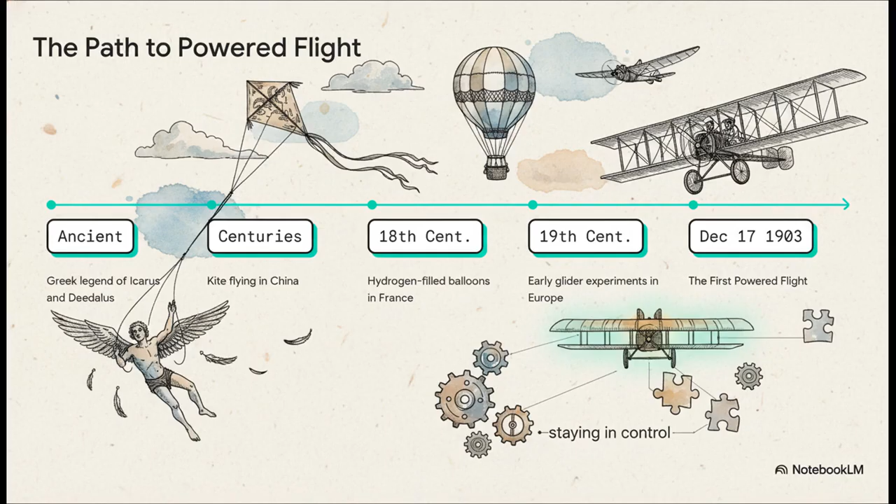See, it wasn't just about getting off the ground. The real challenge was staying in control once you were up there. And the final crucial piece of that puzzle didn't come from some famous university or a government lab. It came from two brothers who owned a bicycle shop in Ohio.

The true genius of the Wright brothers wasn't just slapping an engine on a glider. It was their invention of three-axis control. It was the first system that let a pilot actually steer the plane up and down, left and right, and keep it level. That solved the whole problem.

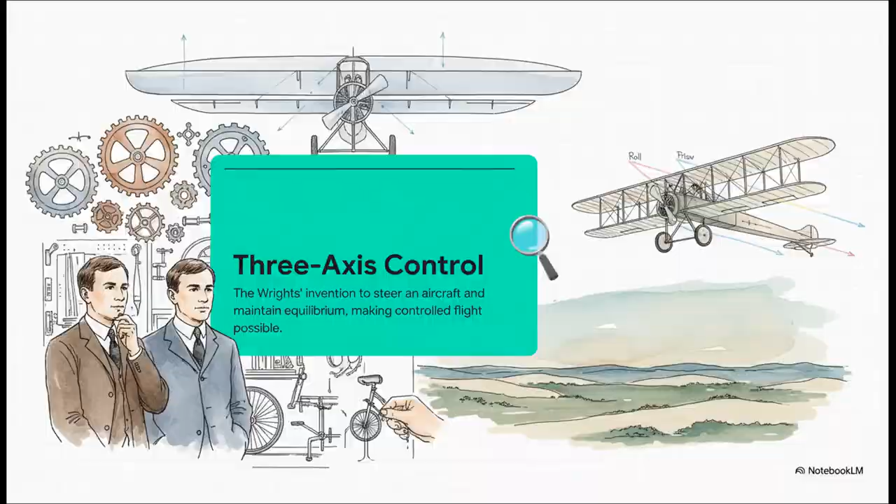And with that breakthrough, on a cold, windy morning in Kitty Hawk, North Carolina, Orville Wright did what no one had ever done before. The first successful, powered, controlled flight in history. And how long did it last? Just 12 seconds. In those 12 seconds, their little plane, the Wright Flyer, traveled just 120 feet. Now, to put that into perspective for you, that is shorter than the wingspan of a modern Boeing 747 jumbo jet. A tiny, tiny hop for a machine, but an absolutely giant leap for all of us.

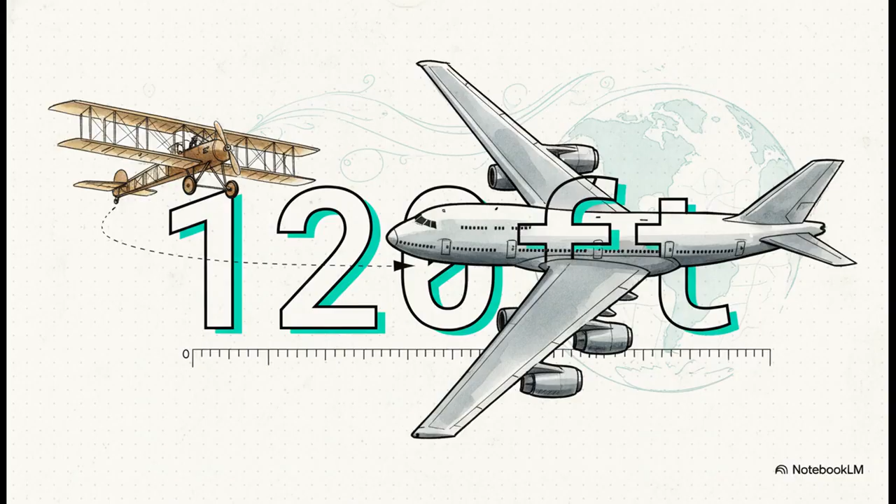But they weren't done. They actually made 4 flights that day, with the longest one lasting almost a full minute. And then, after all that success, a big gust of wind came along and just wrecked their little plane. It was so damaged it never flew again. But it didn't matter. The secret was out.

Humanity could fly. So how in the world did we get from that fragile little wood and fabric flyer to the massive, powerful jets we have today? Well, a huge part of the story is about the materials we build them with. And the evolution here is just staggering. The Wright Flyer was made of spruce wood and muslin fabric, basically sticks and cloth.

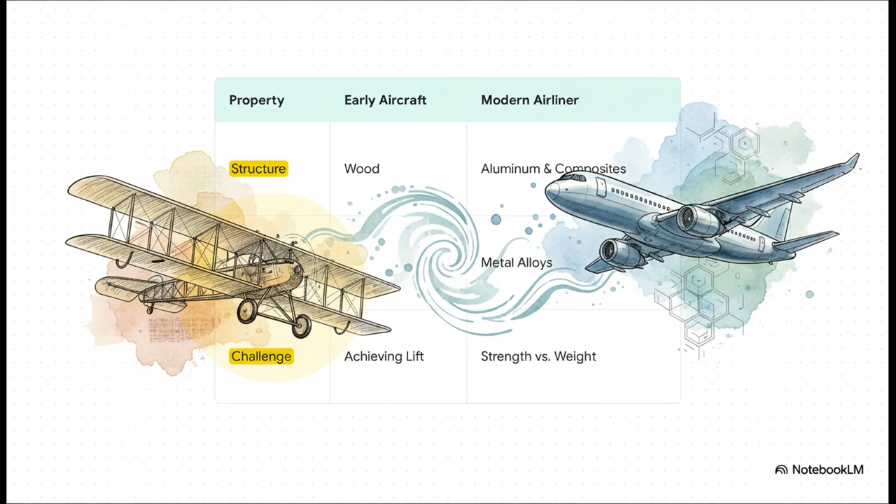Today's airliners are this sophisticated cocktail of aluminum, titanium, and advanced composites. The whole challenge shifted from just trying to get enough lift to this constant balancing act between strength, weight, and of course, fuel efficiency. Now, the real game changer in modern planes has been composites, especially carbon fiber.

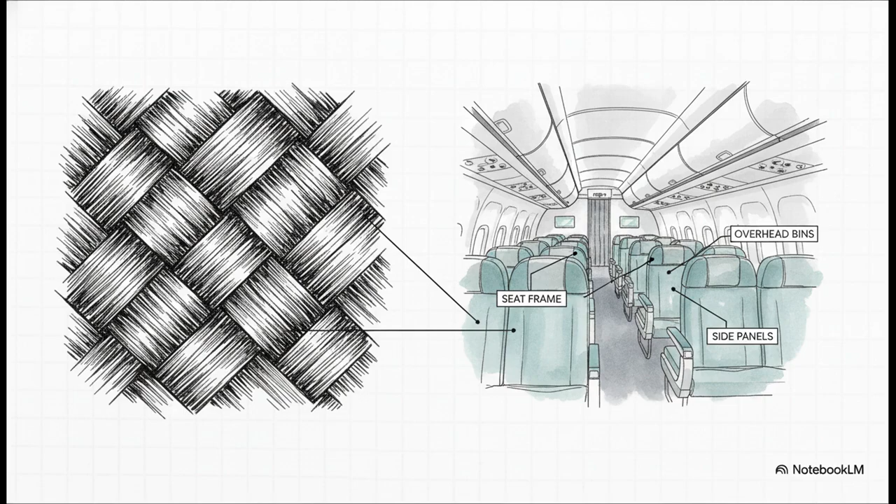This stuff is amazing. It's ridiculously strong, but it's also incredibly light. It doesn't rust, and you can mold it into these really complex aerodynamic shapes that are way more efficient. In fact, next time you're on a flight, just look around. You are literally surrounded by composites. They're in your seat, the overhead bins, the panels on the wall, everywhere.

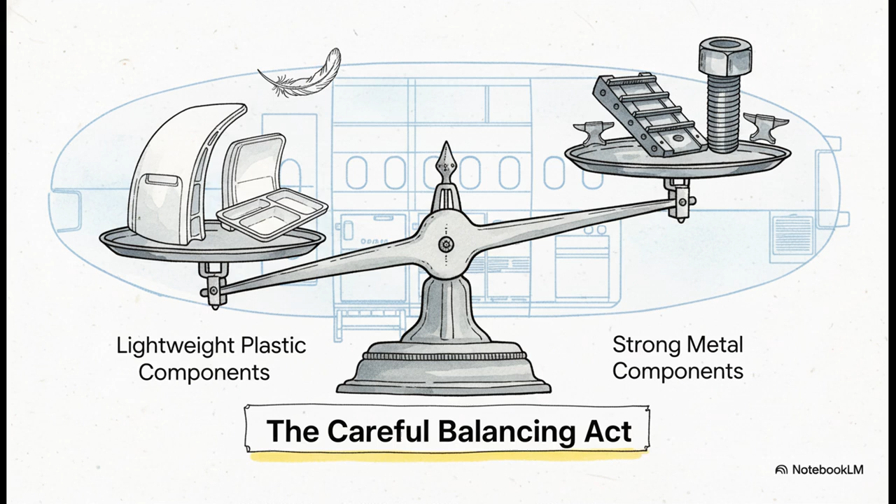And it's all about using the right tool for the job. Engineers use lightweight plastics for all those interior parts to save on fuel. But for the parts that absolutely positively cannot fail, the hidden stuff, like the tracks your seat is bolted to or the latches on the cargo doors, that's where they use super strong metal alloys that can handle incredible forces.

All right, so you've got this amazingly light and strong body, but it's just a fancy glider without some serious power.

So let's talk about the heart of a modern airplane, the engines. This is where things get really wild.

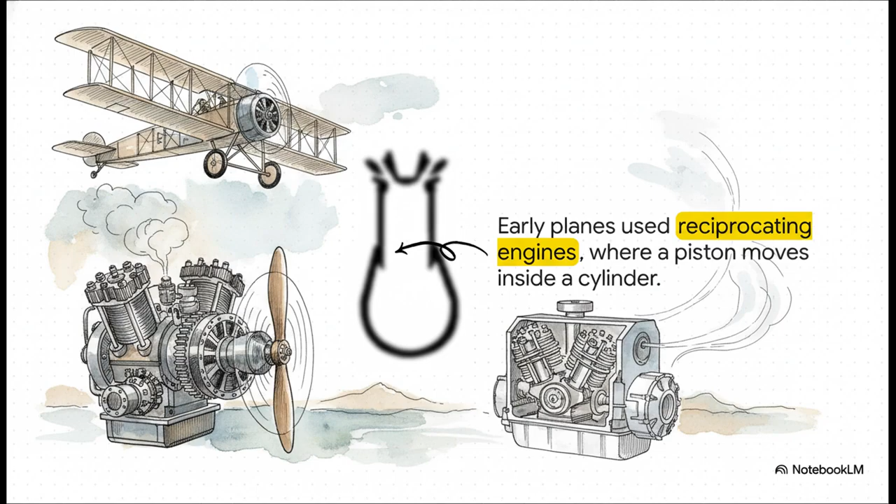The first planes, including that Wright Flyer, used what are called reciprocating engines. You can basically think of a car engine. You've got pistons moving back and forth in cylinders, turning a crankshaft, which then spins a propeller. It totally works, but it definitely has its limits.

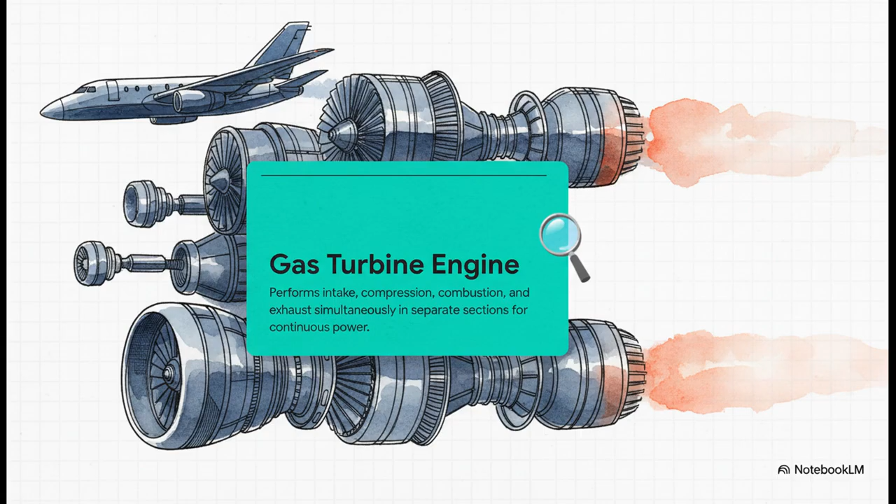Modern jets use something totally different. It's the gas turbine engine, the jet engine. And its secret weapon is that instead of the clunky start-stop motion of pistons, everything in a jet engine happens all at once, continuously. And that creates a smooth, unbelievable torrent of uninterrupted power.

So how does it do it? Well, it's this beautiful 4-step dance.

Step 1, intake. The front of the engine sucks in a massive amount of air. Step 2, compression. A series of huge fan blades squeezes that air down, making it super dense and pressurized.

Step 3, combustion. Fuel gets sprayed into that squeezed air and lit on fire, creating a controlled, continuous explosion. And finally, step 4, exhaust. All of that hot gas blasts out the back at incredible speed, pushing the plane forward.

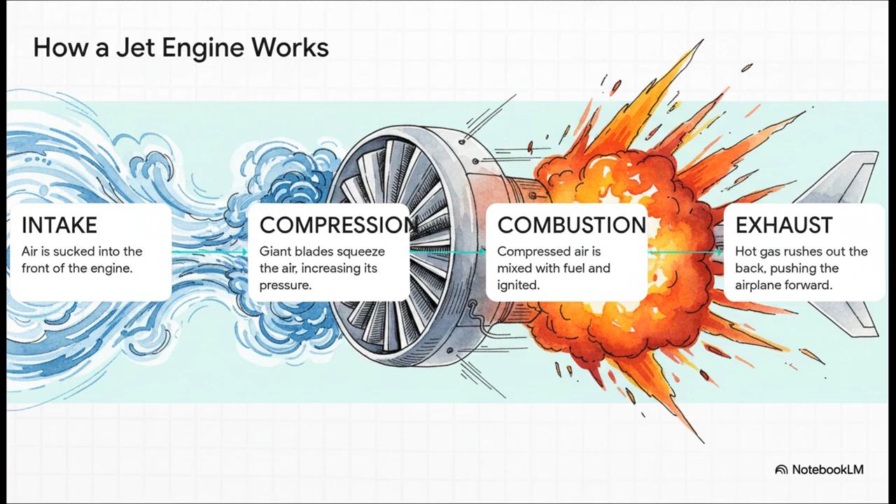It's just genius. Okay, so you've got all this incredible power, all this amazing material science, but none of it would mean a thing if flying wasn't safe. So let's pull back the curtain on the invisible systems that are working around the clock to keep us safe up there.

Aircraft maintenance has completely transformed over the years. I mean, it started out as a pretty reactive job. If something broke, you fixed it.

But now, we're deep in the digital era. Modern jets are covered in sensors that are constantly sending data back to the ground, allowing computers to predict that a part is going to fail before it actually does.

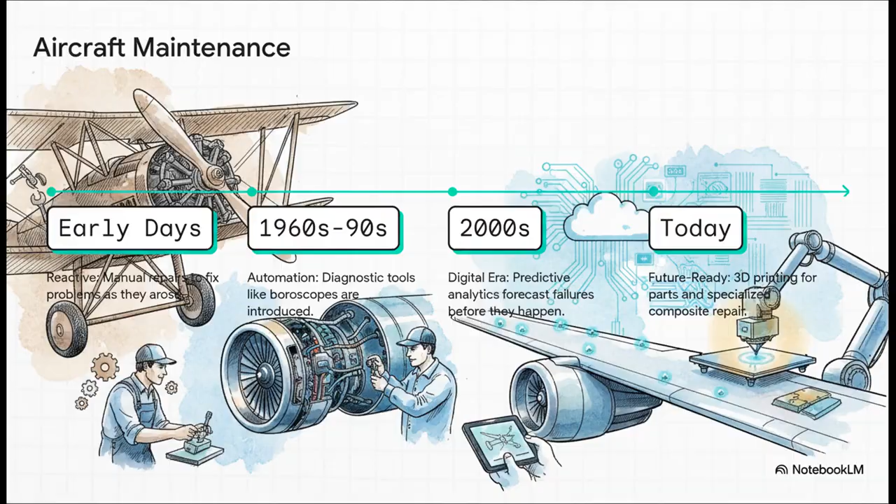And the foundation for all of this technology is a massive, comprehensive rulebook, the Federal Aviation Regulations. These rules literally dictate every single detail of how an aircraft is designed, built, and operated.

For example, check out this rule. It's a federal law that says a manufacturer has to prove that a completely full plane can be evacuated by everyone on board in 90 seconds or less, using only half the exits. Think about that. That single rule influences everything from the width of the aisles to the materials in the carpet.

Here's another one. Fire detection systems have to alert the pilots within 1 minute of a fire starting anywhere on the plane. Just 60 seconds. That 1 minute can be the difference between a minor problem and a major disaster.

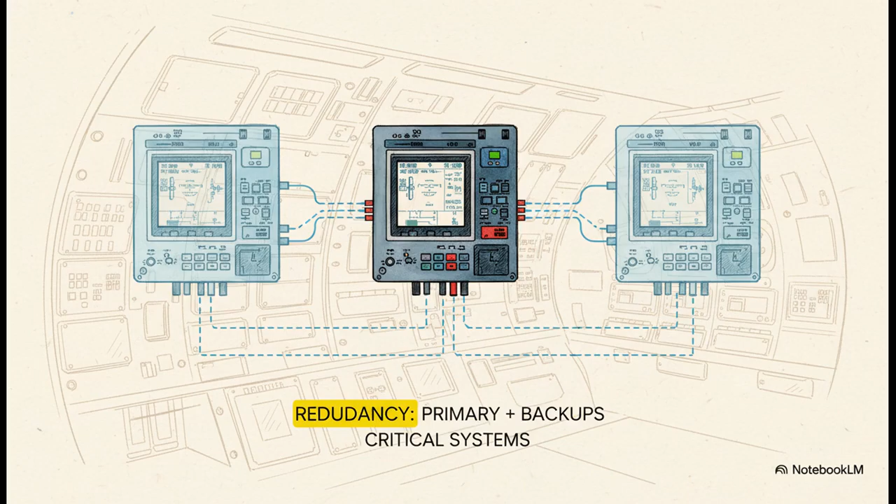And maybe the most important safety principle of all is redundancy. Basically, for any critical system on an airplane, there has to be a backup. And sometimes there's even a backup for the backup. The navigation computers, the flight controls, the radios, everything has a plan B. A single point of failure is just not acceptable.

Which kind of brings us full circle, right back to where we started. From that first fragile little flight at Kitty Hawk, the legacy of what the Wright brothers started has traveled farther than they ever could have dreamed.

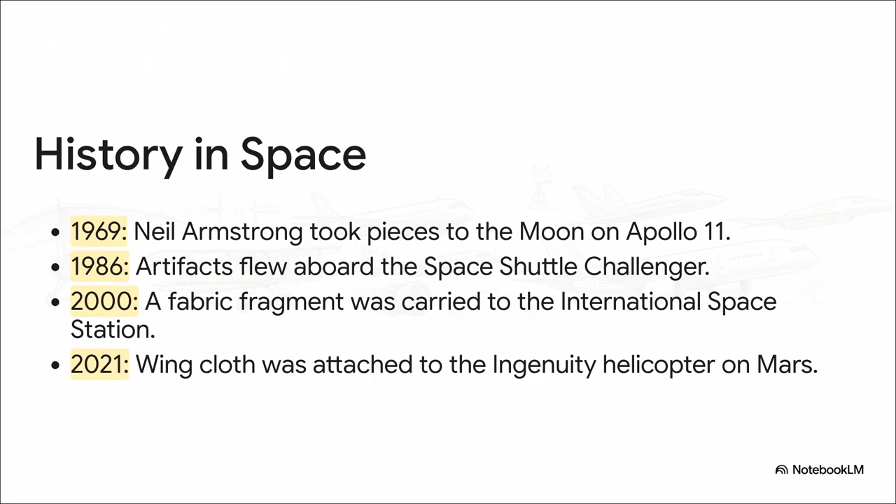This is just an incredible story. Tiny little pieces of the original 1903 Wright Flyer have actually been to space. Neil Armstrong, the first man on the moon, took a piece of its propeller and fabric with him on Apollo 11. It's been on the space shuttle, it's been to the International Space Station, and most amazingly of all, a tiny scrap of that original wing cloth was taped to the Ingenuity helicopter on Mars.

So when that little drone lifted off the surface of Mars, NASA called it, quote, the first powered, controlled flight on another world. A direct echo of the Wrights' achievement, physically connected by a tiny thread of fabric from over 100 years ago. So from a 12-second flight on a windy beach to a 39-second flight on another planet, all connected by a single revolutionary idea.

It just shows you how far a dream can take us. The only question left is, where do we go from here?